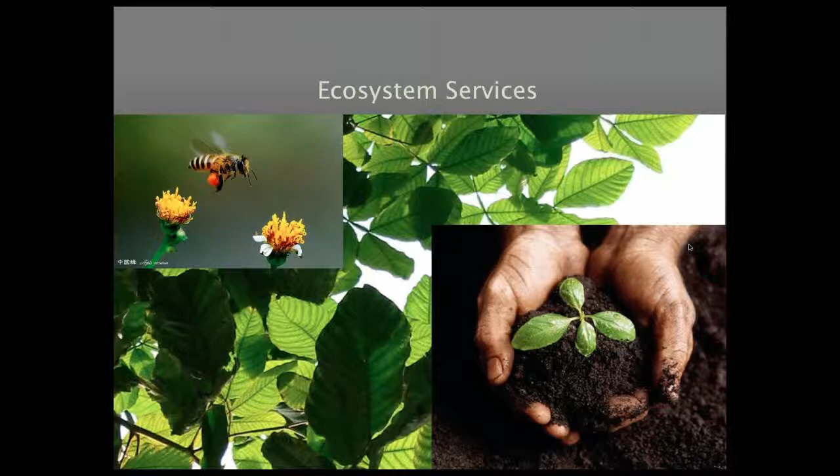Those services are most commonly understood as provisioning services: food, fiber, fuel, the goods and services we use to build our buildings, to eat, to sustain ourselves, to drink. Those are the provisioning services.

Then we also have regulating services, which aren't as commonly attributed to the goods and services we use daily, but basically involve cleaning our air, cleaning our water, and disease mitigation and regulation. Those aren't always top of mind when thinking about ecosystem services.

A little further down the experiential line is what you'd more typically expect from ecosystem services—what are called cultural services. That's the spiritual benefits we get from being in nature and the environment, the educational benefits of ecosystems, and those sorts of things. So those are the basics of what development impacts.

Now we're going to look at how those ecosystem services are impacted by development. Mainly we're going to talk about population and how population affects the services that are provided.

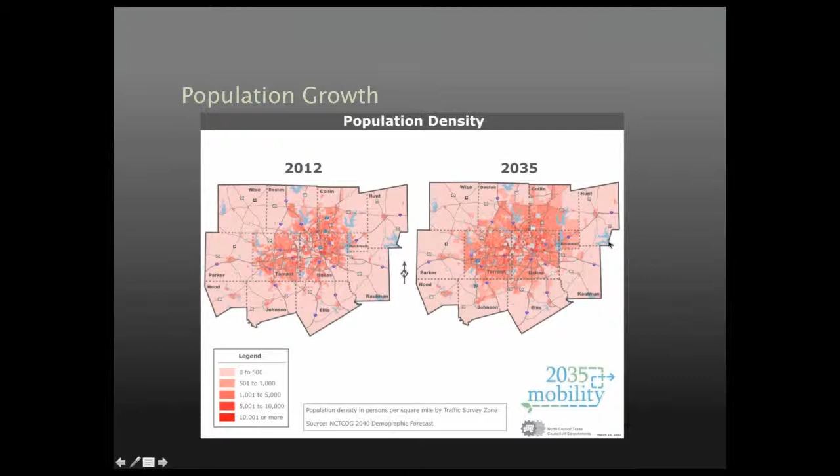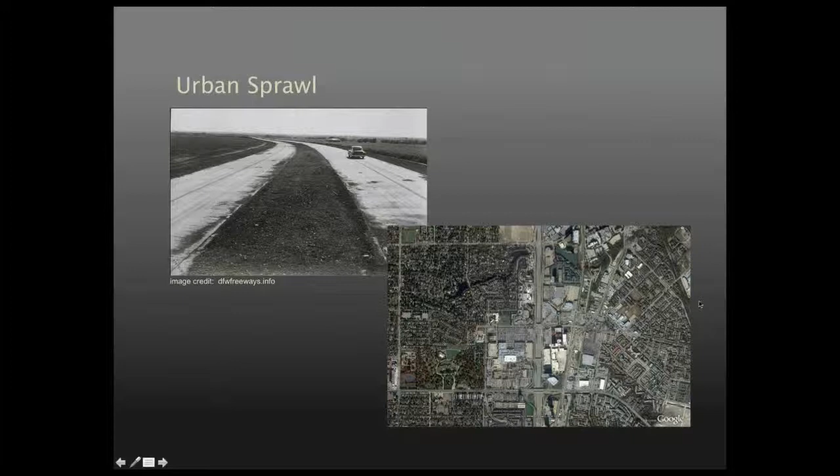So what this is spurring is a lot of habitat loss. Biodiversity is being lost. We're seeing a lot of wildlife in neighborhoods, so we've had reports of bobcats and such preying on small animals and pets. So that's one aspect of it.

We also have a loss of prime farmland. What's really interesting about how cities have developed is that most cities have been developed around rich agricultural land, and that's especially true with Dallas and Fort Worth. Dallas is going to be more the cotton side of the Metroplex, with the cotton and the ranchers, the farmers and the ranchers, and Fort Worth is going to be more for ranching. But basically the population centers were developed around trade for these agricultural services.

As our population has grown and we've developed these areas, we've developed a lot of this prime farmland because these areas were located in the center of the most fertile areas for these crops. So basically our development is encroaching on the area that we're growing our food.

And so the food that's grown in the path of development - we have 91% of fruits and berries, 78% of vegetables and melons. A lot of our dairy and poultry, as well as our grains, are right in the path of development.

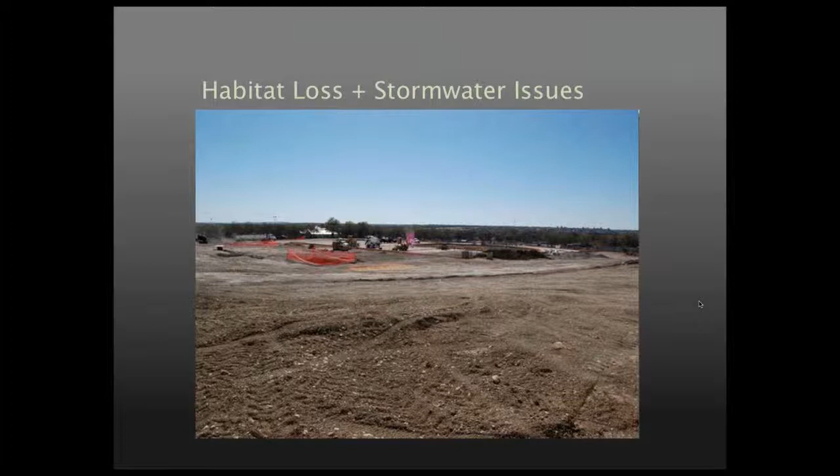So the stormwater no longer has a way to flow with the vegetation, and we have a lot of pavement that comes in, and that causes, especially in the North Texas area where we have very clay-heavy soils, a lot of flash flooding because those soils don't absorb into the ground.

So with flash floods, we have a lot of home damage, we have a lot of road damage, there's major erosion problems, and then there's also pollutants that run into our waterways, threatening our drinking water supplies.

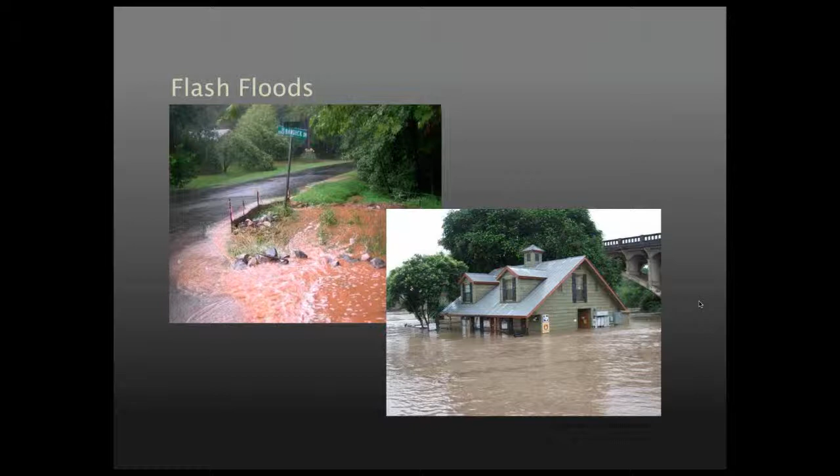In addition to growing out into suburbs and exurbs, which are beyond suburbs, we have growing infrastructure needs. And infrastructure requires a lot of materials, a lot of manpower, a lot of energy, and all of that energy and manpower and those resources are going further and further out, when we could be using the resources that we already have in place in urban areas and suburban areas.

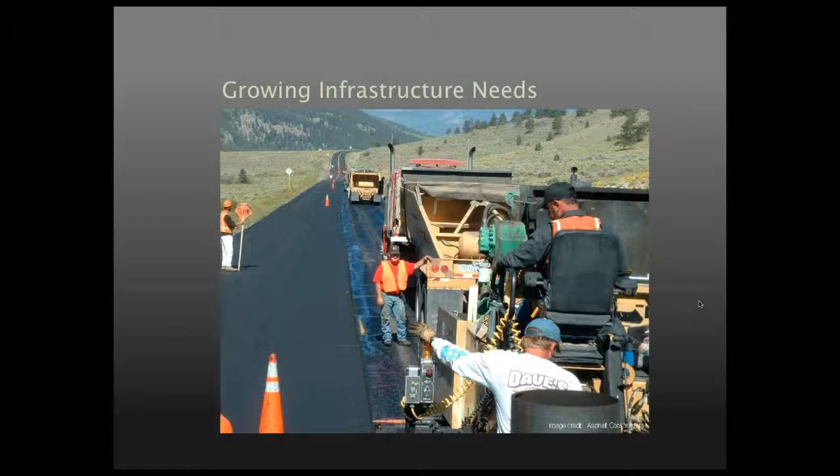We'll get a little bit more to that in a moment. So that infrastructure goes not just for roads, but also for water and wastewater, electrical lines, those sorts of things.

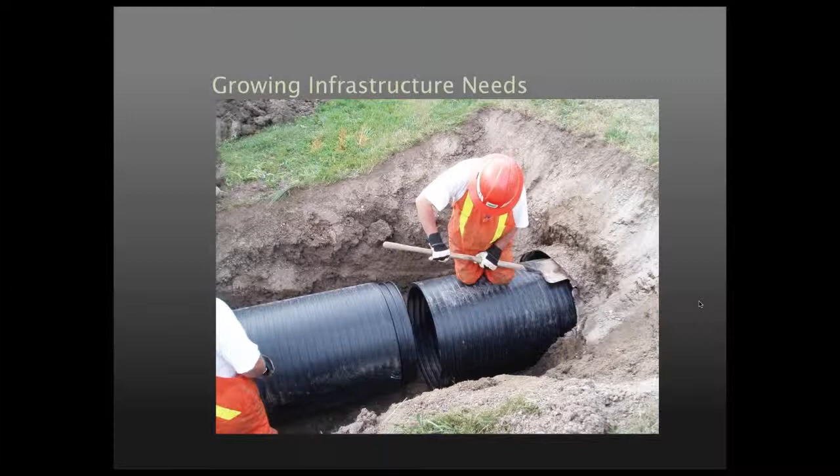And it occurs to me that even if you're walking through a strip mall associated with a big box store - I remember one time I was going to a movie in a strip center, and we had some time before the movie started, so we decided to go for a walk and shop a little bit. And what occurred to me as I was walking down the strip center is that there were no signs for the pedestrian to show what stores they were.

I mean, there were a couple of stores where there weren't even signs on the windows. So I would have to walk into the store to see what store that is, because it's so geared towards people pulling up in cars, shopping in that store, and leaving.

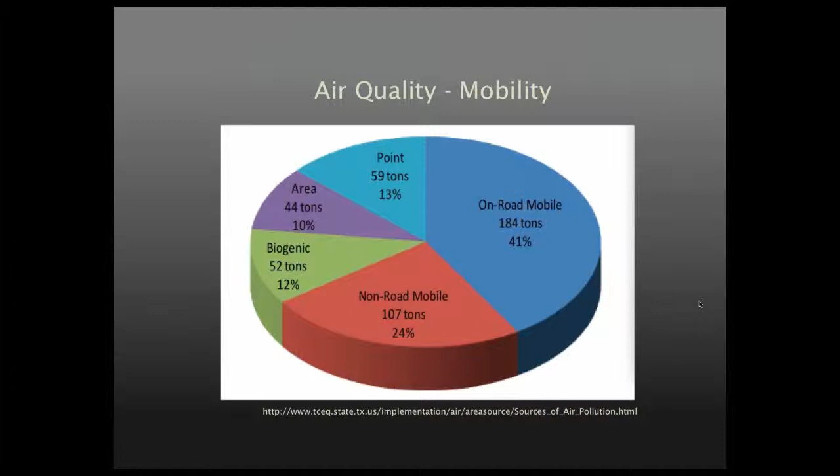What's interesting about this study is that it assumes that there's rail everywhere, and there's still a great deal of congestion. Some of these rail lines are still not funded, so it's definitely just a projection on that aspect as well.

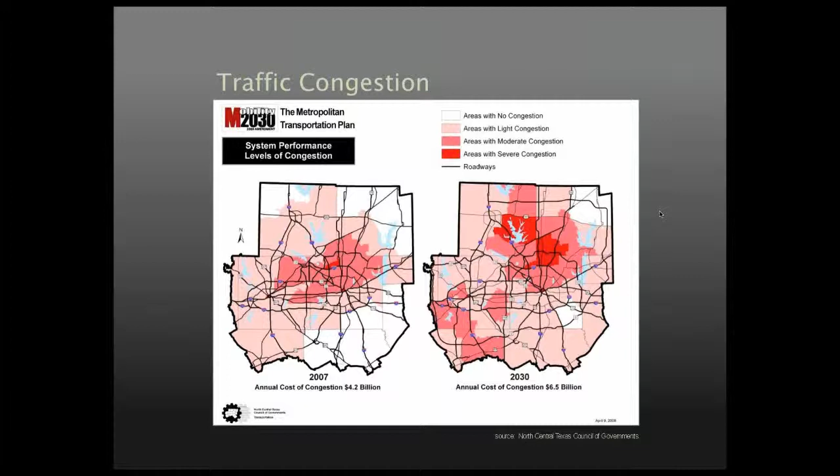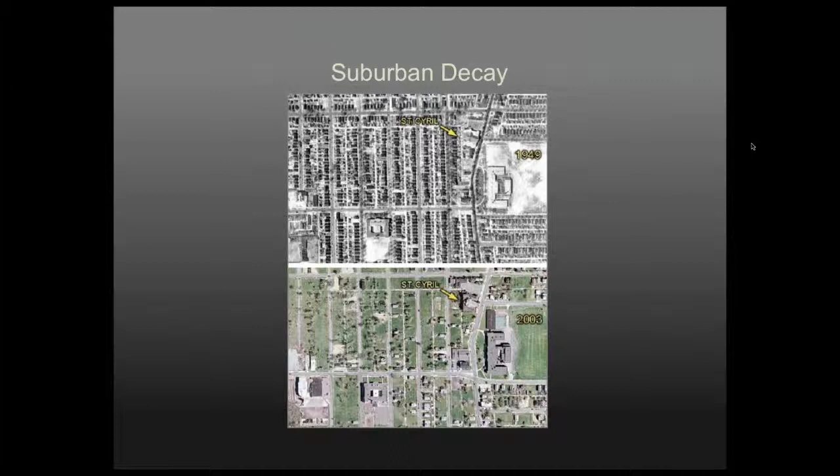Another problem with the North Texas region, and again, regions all across the U.S., is going to be our centralized power grid. What this causes is several issues whenever it comes to security, having large centralized power generation facilities are a security target for attacks, let's say. When you're dealing with Middle East threats, that's probably going to be the least likely to happen.

But we also see an 8% loss of energy just from the transmission of the power line. So when we have this large centralized power, we're losing at least 8% just to get it from the remote areas to the cities. We also have a lot of coal-fired power plants in North Texas, as well as natural gas-fired power plants, and there are carbon emissions and nitrogen oxides being emitted from those that's contributing to the air quality issues.

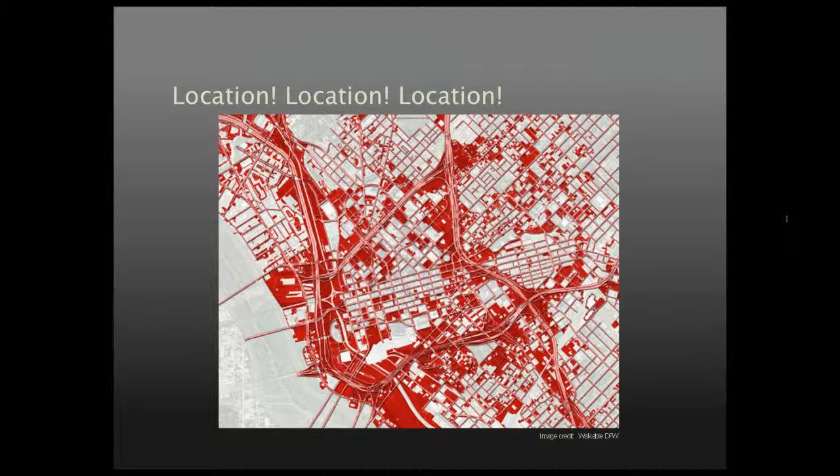What this does is it decreases pressure on farmland and native habitat. So where we already have pasture land and native spaces, if we build in, we're not building out, and these places are going to be preserved.

Farmland is a key piece of the puzzle we've talked about already. And we also want to build in transit-oriented areas, so basically transit-oriented development. We're building near trains, near already planned transportation corridors, so that we can build on the system that's already there, so we can use that existing infrastructure.

And then we also want to think about how we develop, how we zone our areas. Right now what we have as our typical zoning system in the United States is segregated zoning.

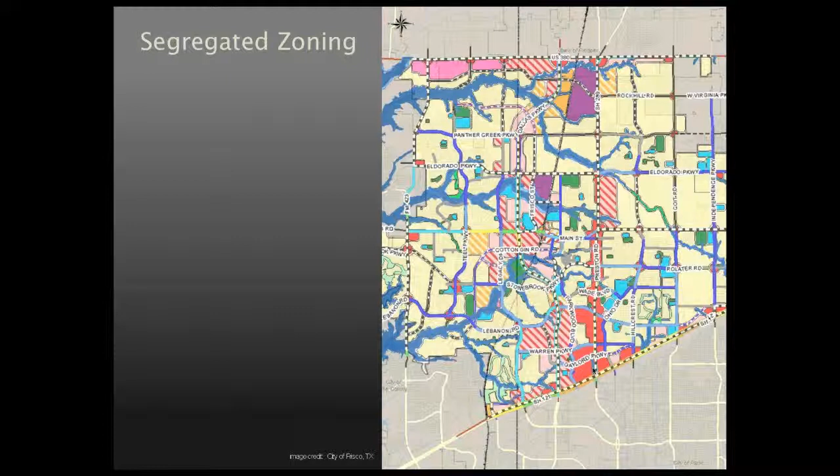So what we're seeing is zoning by use. It's called Euclidean zoning, based on the initial Supreme Court case that ruled that this is appropriate. So what you see is use-based zoning: you have a residential area in one place, and then a commercial area in another, and then industrial or retail, and everything is really just kept apart from each other. That's where it really encourages people to have to get in their car to drive to the grocery store, to the dry cleaner, to restaurants or shopping.

So the Congress for the New Urbanism has proposed an alternative to this Euclidean zoning system, and that's going to be the SmartCode. The SmartCode is developed around the natural transect, and it looks at nature to see how to organize the development.

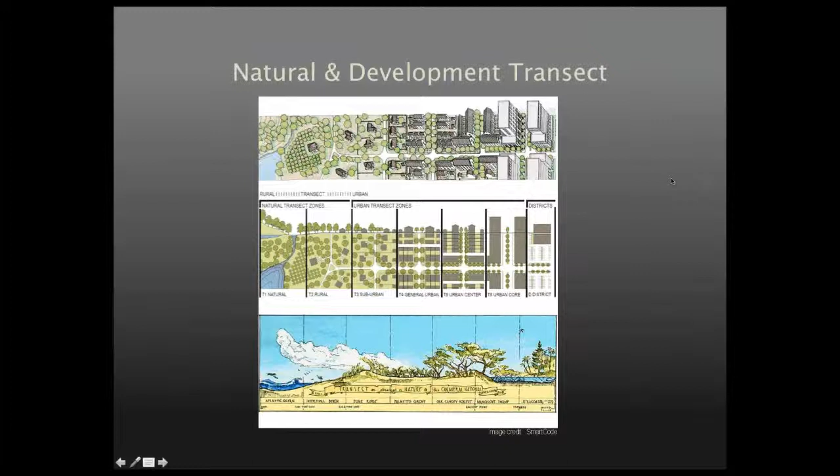So what we see here is how to develop our communities around this natural transect. What you have then are special districts, so that would be a hospital or any kind of industrial area. And then you have an urban core zone, which is going to be a highly dense area with lots of different services. A lot of people probably attribute that to something like Chicago or Manhattan.

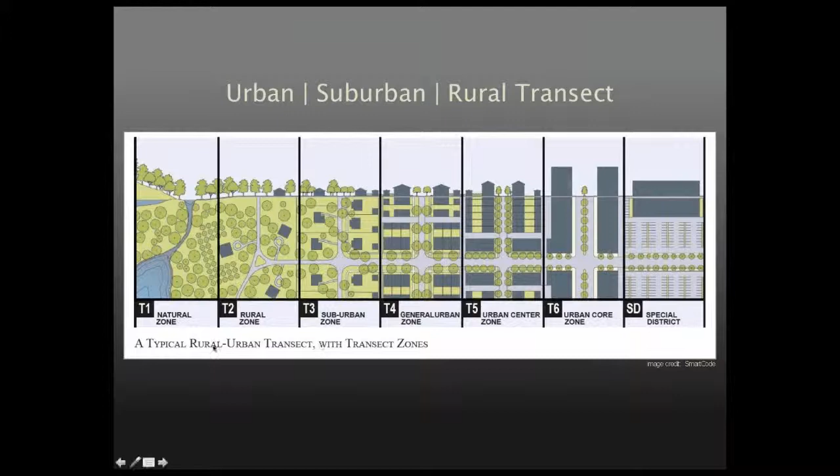And then you have more of an urban center zone. It's going to be a little less dense, more of your small towns, mixed uses, houses with shops and living spaces above, and then some housing in there as well. And then a general urban zone, which is again a little more residential, a little less commercial. The suburban, where it's going to be more of a residential aspect, fewer commercial as well, and rural, farming, and then a natural zone.

So the way we see this happening is in this traditional neighborhood development pattern. So when we talk about the word density, there's a lot of, especially in North Texas, a lot of negative connotations. People think of density as Manhattan.

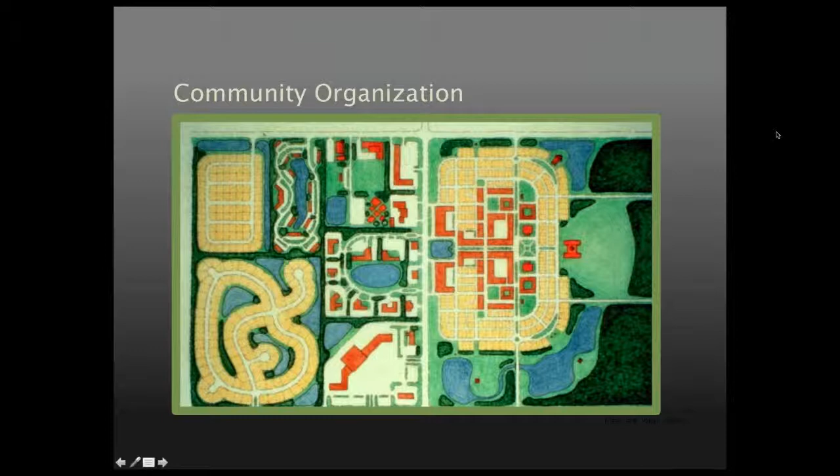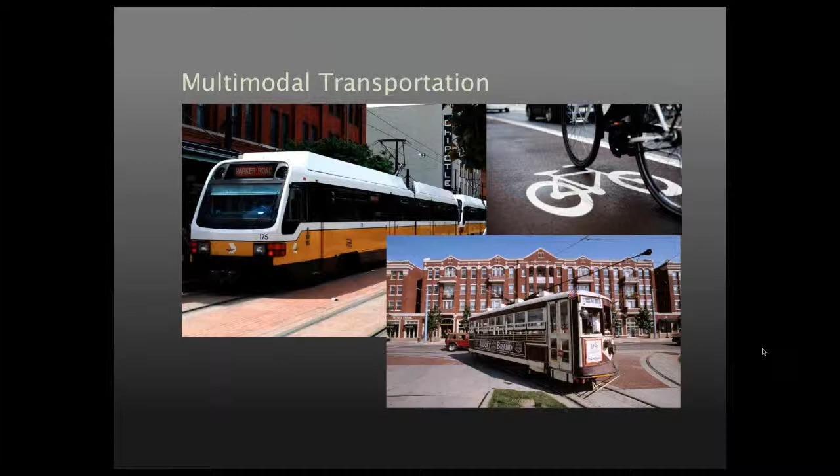We also want to look at multimodal transportation and all types of transportation use. So you do have cars—we don't reject the car in this scenario—but we also look at other ways to transport people: light rail, trolleys, bicycle, walking, however you want to get around, having options. If you want to drive your car, absolutely drive your car. But if you want to ride your bicycle, to have that infrastructure there as well with bike lanes. In Dallas, there's actually a great bicycle plan under development that's already being implemented.

What we're also looking at is designing for flexibility. When you think about how to build our buildings, take a big box store, for example - that's oriented to the automobile on the side of a highway. Whenever that store closes down or relocates, that space is left with very few types of uses. We've seen them develop into churches, paintball venues, sometimes movie theaters. But when we think about how we can design these spaces, we need to think about flexibility when designing buildings.

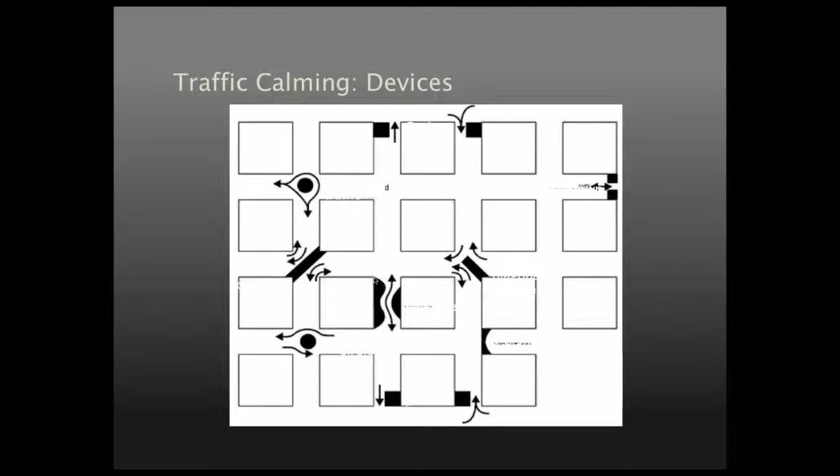So another aspect of using street trees is it gives the pedestrian a sense of security. When you're walking along next to the building with trees between you and the street, you don't feel as exposed as you would, say, walking through a large parking lot into a retail establishment.

We also want to look at access to different services - being able to get to a farmer's market or restaurants or shops on foot or by bicycle, getting out and meeting people in your community, and feeling a sense of community by getting to know the people around you. When you live in an area where you get in your car, go to work, see your coworkers, get in your car, go home - there are a lot of people who can live for long periods without talking to their neighbors.

We also want to look at access to jobs - whether it's building residences next to a train that goes to a job center, or putting office spaces or jobs attached to residential areas, so those things can intermingle and people can get to work and get home very easily and in multiple ways.

When we're talking about the aging population, we're also talking about what type of housing stock we have. When you're looking at sustainable development patterns, we currently have zoning for lot sizes where you might have a single-family home with a 7,000 square foot lot versus one with a half-acre lot, all grouped together in large tracts of land. That may be acceptable for a family of 4 or 6, but whenever the kids grow up and graduate from high school and want to move into a different space, they typically have to leave that neighborhood, or even that town in some cases, to set out on their own.

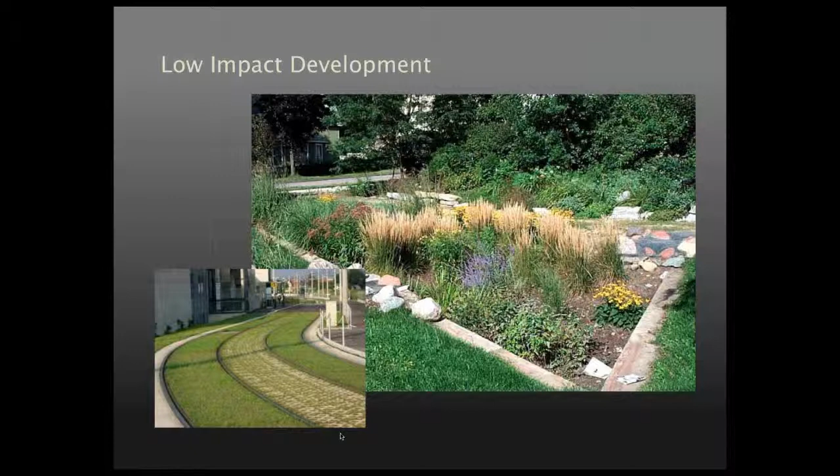Here we have a green rail line that provides erosion control and stormwater infiltration services, while also providing rail service. Again, looking at heat island reduction with vegetated roofs and vegetated parkland to cut down on the energy consumption of the buildings in the area.

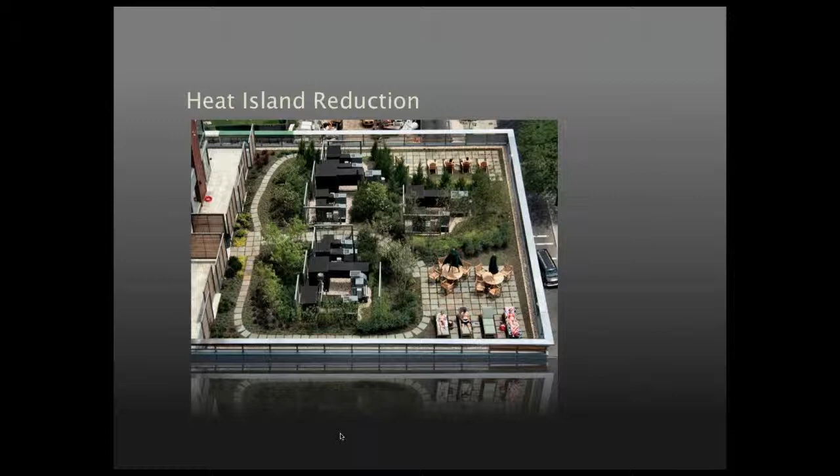And then to counter the centralized energy model, energy grid, looking at distributed energy. So if you place energy where people use it, you save that component of transmission loss and have a more secure grid because you have areas all across town that are making their own energy as well as feeding into the grid.

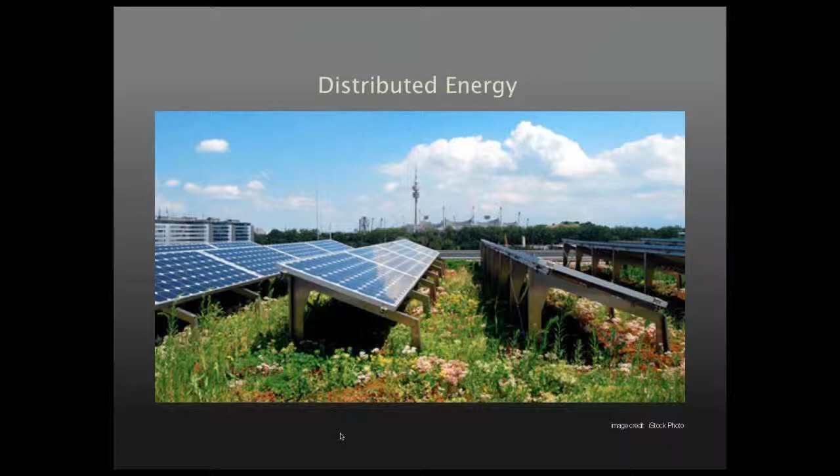You can also use what's called tri-generation, which is using that waste heat to power cooling. So you're using what's left over to make the surrounding area more comfortable and saving that energy in the end.

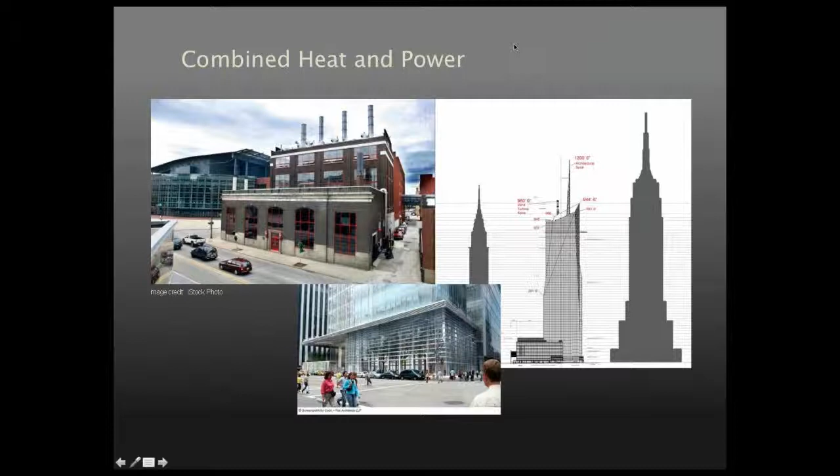A lot of the pushback for energy production in populated areas is kind of that not-in-my-backyard, NIMBY approach, where we don't want a power plant in our neighborhood, but it doesn't necessarily have to be an unattractive plant. It can be incorporated visually into the space as well.

So then, how is development sustainability measured? There are a couple of different rating systems I'm going to talk about, namely LEED for Neighborhood Development, developed by the U.S. Green Building Council in association with the Natural Resources Defense Council and the Congress for the New Urbanism. This looks at the neighborhood in three different ways: smart location and linkage, neighborhood pattern and design, and green construction technology, splitting out the goals of the different organizations into these three categories for metrics.

Smart location and linkage is about where you're locating your building, your impact on agriculture, floodplains and habitat. Neighborhood pattern and design is more about how you organize communities around connectivity, walkability, and that personal experience. Green construction technology is more about how the buildings are made, more like the traditional LEED program for energy and water efficiency of the structures and stormwater management.

It's developed on a 110-point scale, and you have four different rating certifications: certified, silver, gold, and platinum.